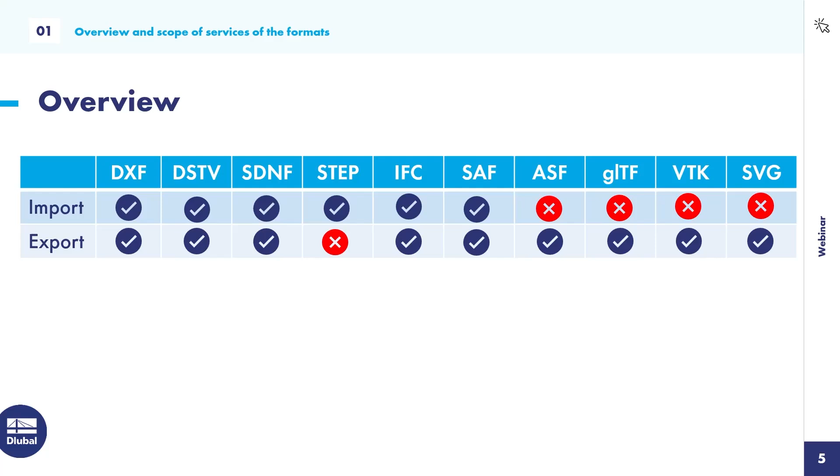Let's see what's behind that. We will start with the DXF interface and some brief overview about the import and export possibilities.

Concerning the import, we mainly support the import of nodes and lines. You can, however, also import members from the DXF format. To do so, you have to mention the cross-section and optionally the material name inside the layer, and then we can read this information and automatically create members. We can also import surfaces from AutoCAD, however only if the object is a 3D face element.

Concerning the export capabilities, here we mainly export nodes and lines, so members with the graphical rendering in RFEM will be exported as a simple line, not as a 3D rendered object. We can also export dimension lines, and concerning the results, for example the FE mesh or the deformed structure, as you can see here on this graphic.

One more information regarding the import: there are two options. We can import the DXF information directly, so you get the lines and the nodes and so on, or you import a DXF as a background layer. That is of course also possible.

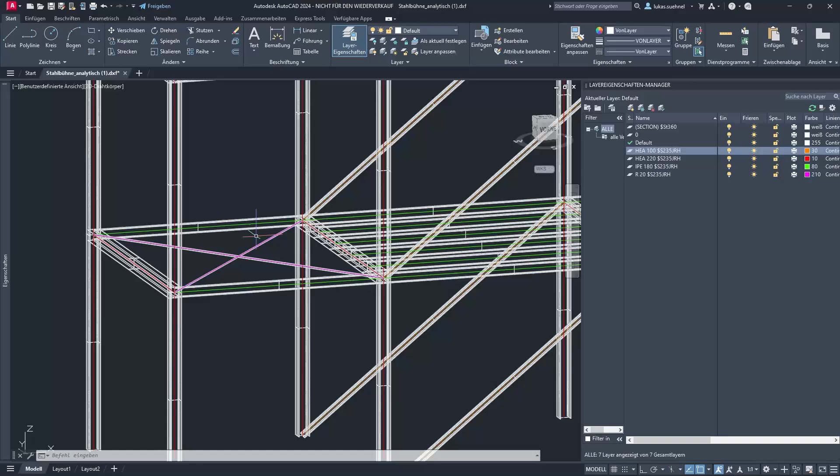So if you have that, you can import this into RFEM 6. I already saved it as a DXF file, so there's nothing to that. And then I can go into RFEM 6, go to File, Import, and use here DXF2. I can select the DXF file, and then I will get a little dialog that allows me to define additional settings.

First of all, I want to rotate the structure because otherwise it would be upside down due to the global coordinate system. I want to generate the members based on the layer names, and I also want to import only selected layers. So in that dialog, I already see which layers I have inside that DXF file, and I'm not interested in the default or the specific section layer - I only want to import the center lines, basically.

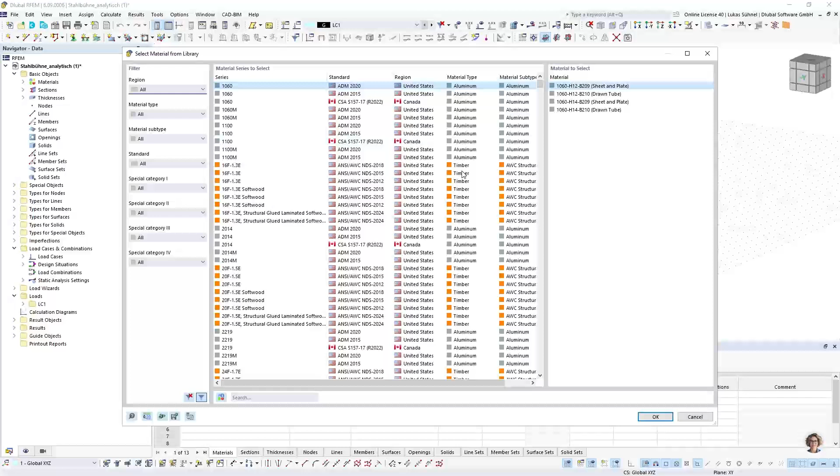Let's take a short moment. The cross-section or the conversion tables will open. In case your layer names do not match the cross-section or material names inside RFEM, you can define them in this conversion table, assigning the related Dlubal material or section, and then import it.

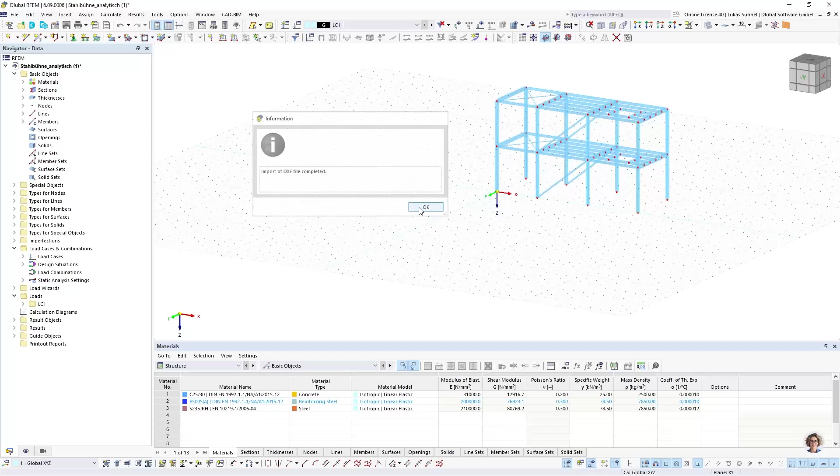Should be filled correctly on my side already, so I don't have to do it. I just click OK, and now RFEM will lock itself. You can see it on the bottom, everything is grayed out, I can't do anything. This is on purpose, since we are using our API to read this data, and while the API is working, you're not allowed to do anything in RFEM, so we are locking the screen.

The import is finished, and you can see the same structure here in RFEM now. We can briefly check the imported data, for example by using a specific display function. I can use colors of rendered objects by object property, member section, for example, and then quickly double check if I have the right sections in my file - basically if the conversion was set up correctly.

Or you are running additional checks, for example under Tools you have a model check for identical nodes. It shows up quite often that in DXF files there are nodes very close to each other, or lines, multiple lines on the same location, and we have these model checks that can help you find these situations. For example, you can set the tolerance for identical nodes to 1 centimeter, and then check if in a radius of 1 centimeter there's more than one node, and you would see those nodes here. It's not the case here, so should be fine.

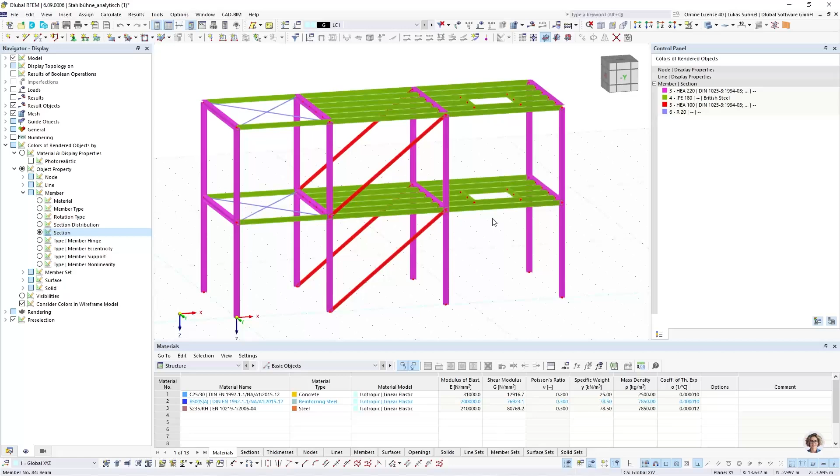And with this data, with these native objects, members, lines, and nodes, you can continue with the loading, the supporting, adjusting the structural model in general, of course. That is the DXF import.

And now I also want to show you the export. So let's open another file - I have them prepared, of course. That is a membrane structure, a little tent basically. Let me show that quickly.

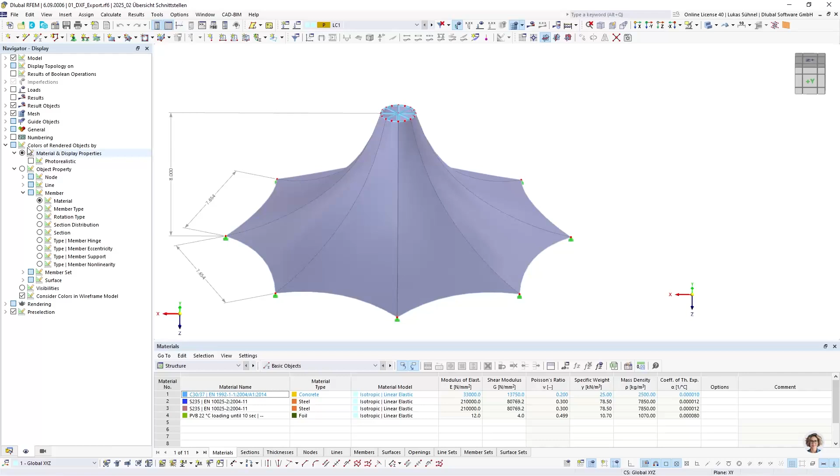All right, so here already with the results, but I can turn them off. So maybe just some brief information: in RFEM 6, you're able to run form finding calculations.

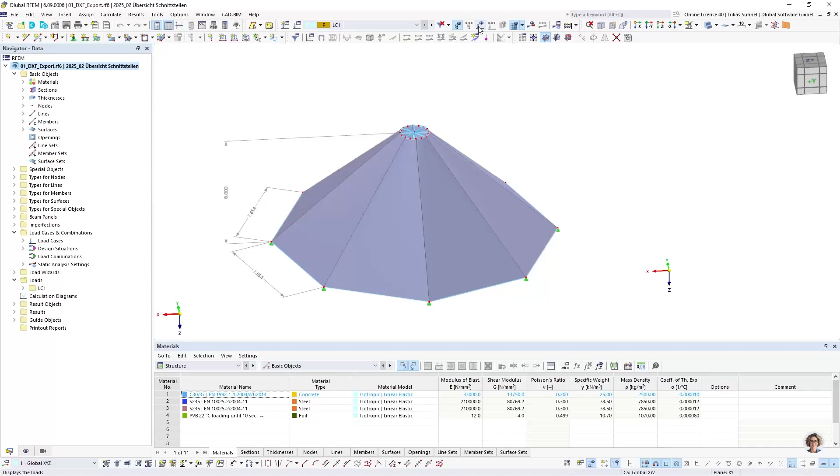Therefore we have this specific add-on, form finding, that allows you to model these membrane structures as we have it here. You can support these membranes on the bottom, for example, via a cable, and on top with this supporting circle of beams. And then you need a pre-stress load case, and inside the pre-stress load case you can define the target force, the target stress, or the target sag of membranes and cables, which has been done here.

And then you can run the form finding, and RFEM will calculate the required shape, or the shape that is required to fulfill these loads, or these predefined loads.

Now that is the result, and it is quite common to export these structures into AutoCAD for additional drawings and so on. So we developed not only the DXF export, we also included options to export the deformed shape.

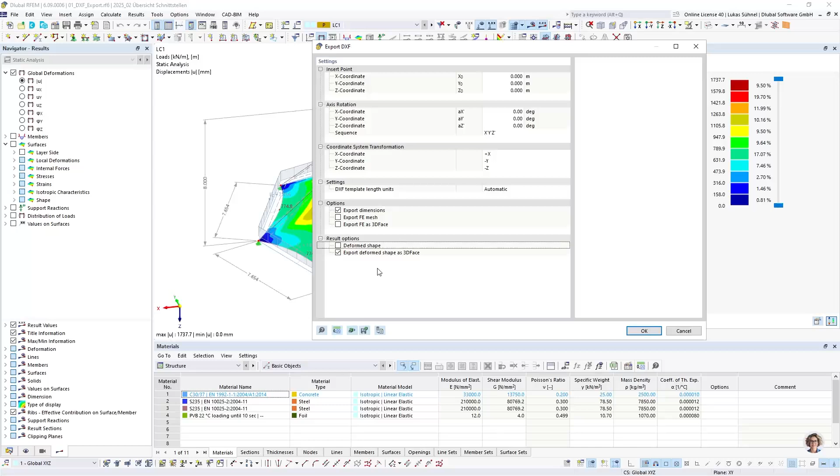Put it on my desktop. And I have here various options for the export. I can export dimensions, I can export the original FE mesh, so the FE mesh that we create before the form finding analysis, which I can export, but I'm not interested in that. I can also export the deformed shape, or actually I'm just looking for the deformed shape as a 3D face, which helps me with the rendering. So these are the settings.

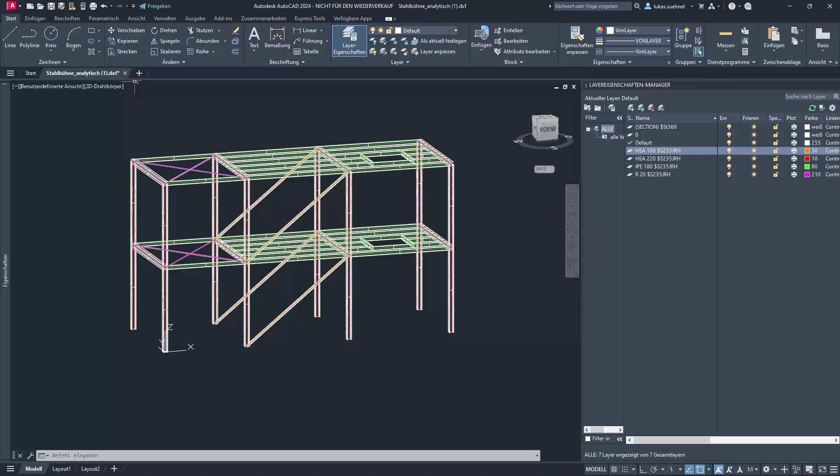I press OK. RFEM should be locked again in a second, because we're again using our API. Yep, happening now. And as soon as it's finished, it will unlock and give us a message, export is done. Now I can go back into AutoCAD, maybe close this file here, and then I can open the deformed shape DXF.

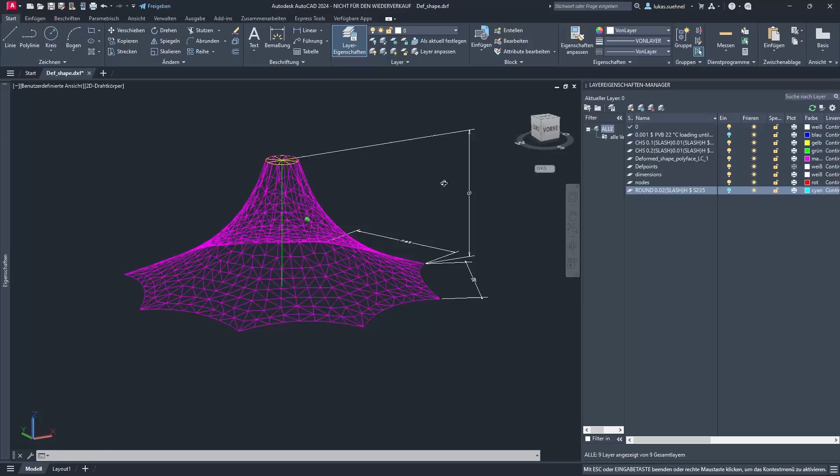Let's zoom in. So that is the result. Now I can hide a couple of layers which I'm not interested in, these cables for example on the bottom, and I can display the deformed shape, and also use a different rendering setting for a nicer graphic.

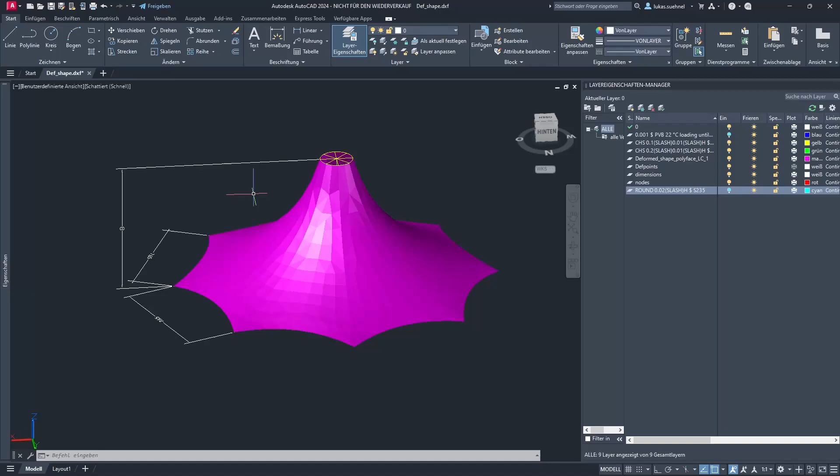That is what we can do here. We can also see the dimension lines - it's not just simple lines, it's a real dimension line where I can change the settings and so on. All right, so far regarding the DXF interface. Let's already go to the next one, and the next one is the DSTV interface.

The DSTV file format was developed, introduced by the German Steel Construction Association. I have a product description from 2000, so it's a rather old file format, but it has many strengths when it comes to exchanging pure beam structures. It contains relevant information such as cross sections and materials for the members, but also supports, hinges, eccentricities, member types, set of members, member elastic foundations, and concerning the loading, the typical nodal loads, member loads, imperfections, and of course load cases and combinations.

Due to these diverse options and the simple definition inside the format, which I will show later, it can be found in many programs. So many of the steel detailing, but also other programs, use or offer an import and export into the DSTV file format.

And I listed some of them at the bottom: Tekla, HiCAD, from the steel detailing area, then CADwork, HSB CAD, SEMA from the timber construction world, but also additional programs like BuildSoft, Infograph, and many more.

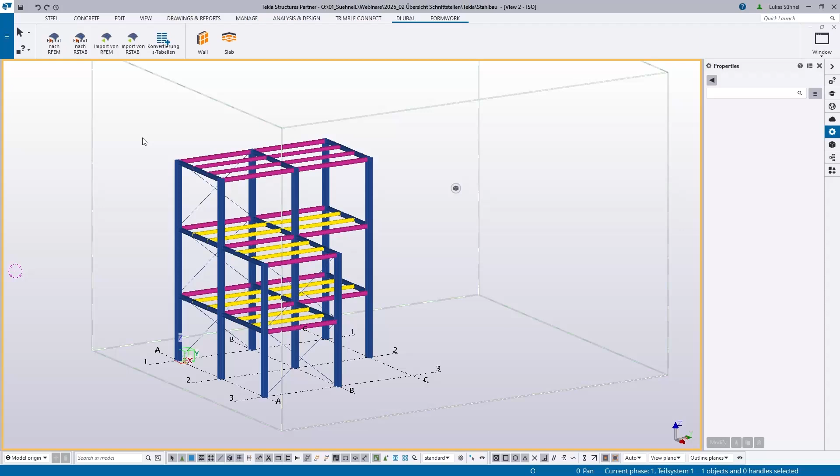I want to show how you can do it. First of all, you select the objects that you want to export, then open this menu and go to export. Now, not so well known, I would say, is the FEM export, and here you find the DSTV file format.

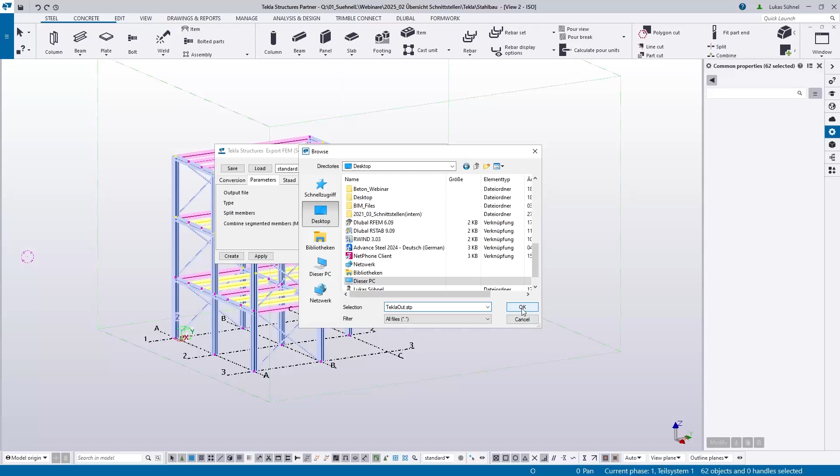You can select the output file location under the parameters tab, so I put it on my desktop, Tekla out. Little hint: add the .stp description here, then it's easier to find it in RFEM 6 when we are importing it. Press OK, then click on apply and create, and the export should be done.

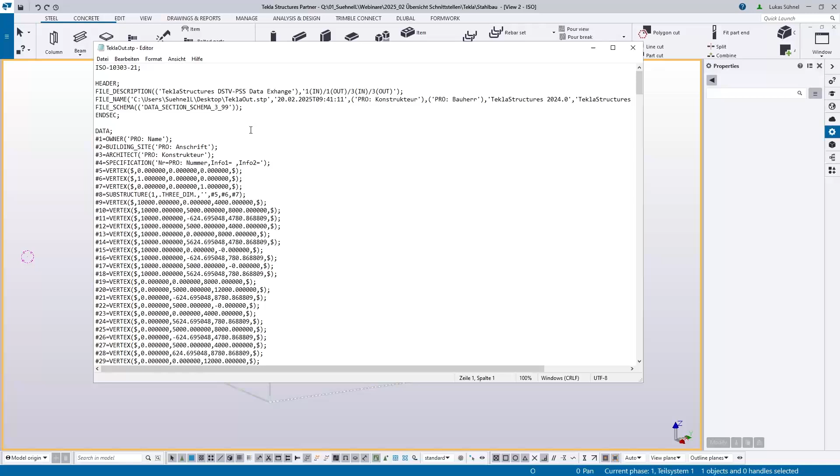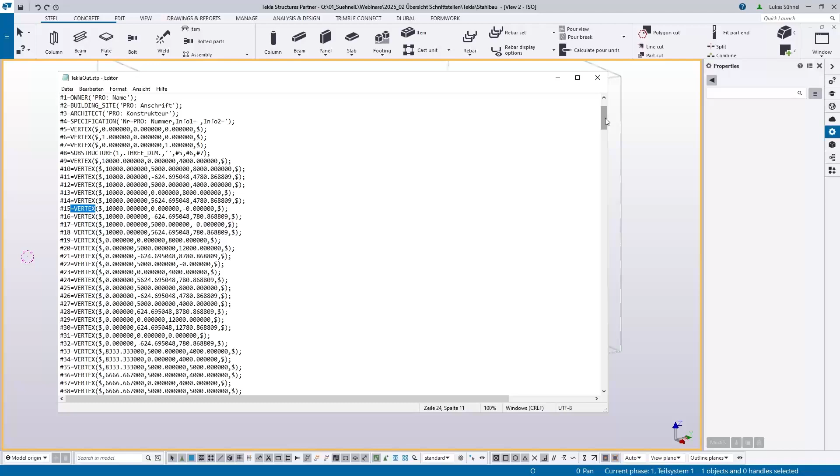Let's have a brief look, I will open the file. This is how the file format looks like. You can simply open that STP file with an editor, and you can see the program it originates from, maybe even the person who created it, the version of the program, and then you get a long list of nodes. So vertex is basically the node, with coordinates, then we have the material and the cross sections.

Here the focus is usually on the name, because we are converting the names anyway. It's not about importing the cross-section values or something like that, which can also be documented in here, but theoretically Tekla doesn't do it.

After materials and cross-sections, we have these elements, and these are basically the beams. So the beam or member type, start and end node, the cross-section at this member's start, cross-section at member end, so it's possible to exchange also tapered members. Further down, there can be more information about loading and hinges and so on, which is not the case here.

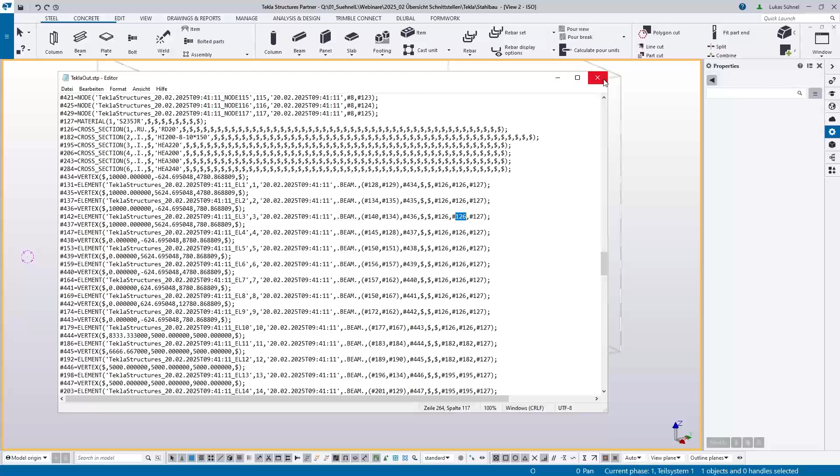All right, so let's import that file into RFEM 6. I'm closing this membrane structure. File, import, DSTV. Desktop, just navigating into my folder, Tekla out. Okay.

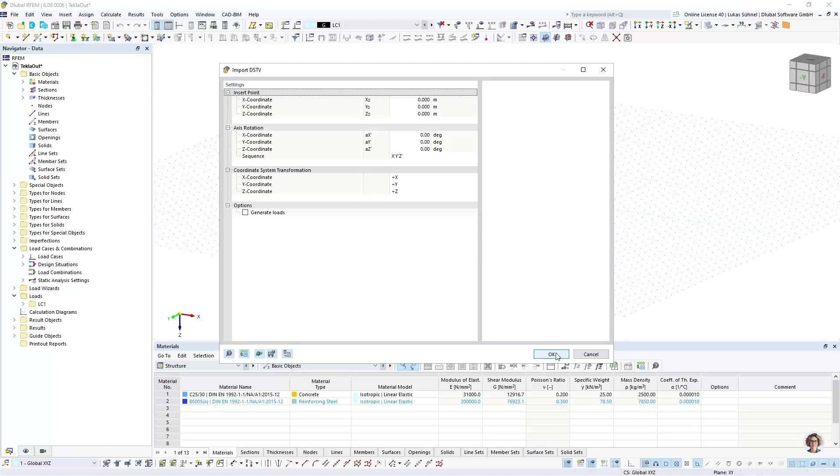RFEM will be locked again after I define, or after I press OK in that screen. So I could import the loads, but there are no loads inside, so I leave this toggle unchecked. Then again, conversion tables to match the section names - I did that already. I can press OK, and the import will start.

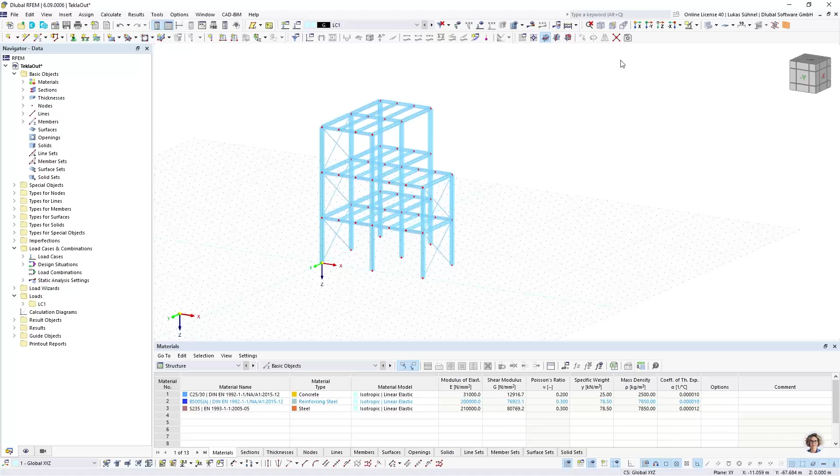All right, so import finished. We have a couple of free nodes which have no use in that moment. I can get rid of them by going to the edit menu, select, and then we have an option free nodes. All of these free nodes will be selected, and I just hit the delete button on the keyboard and they are gone. Now you can see we have the same structure as we had in Tekla.

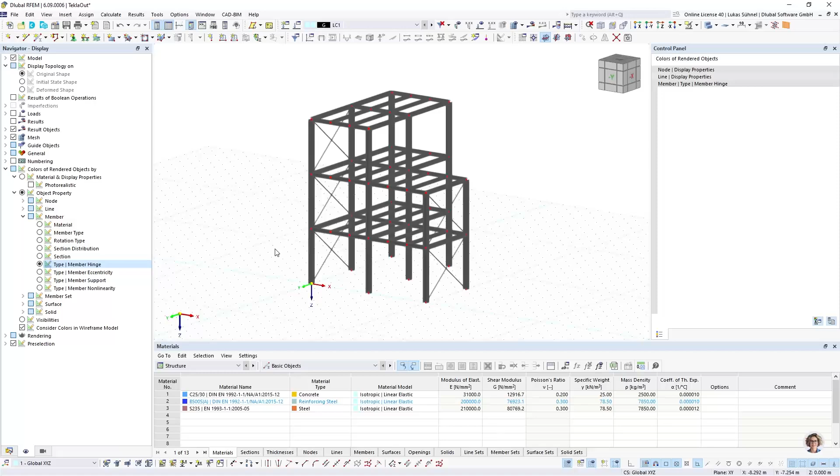Again, I could double check the content by using some rendering functions for the cross sections or member types. Here I can see it's just member type beam, and if I select the member hinges, there are no hinges assigned. So I got a model from Tekla where every beam is connected rigidly to the next beam. That is not ideal - in RFEM, I would continue now with adaptations concerning this analytical model.

And some of these adaptations could be the following. Let me show rendering by material again.

I could select, for example, all these bracing members and assign them the tension member type, and this can be done rather quickly. I have these synchronized selection options in RFEM, so if I click in the data navigator onto a specific cross-section, all the members with that cross-section will be highlighted.

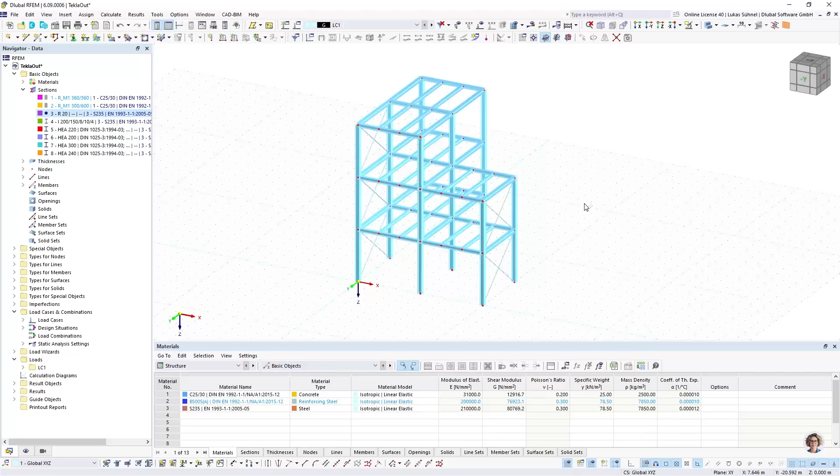So there's no need for me to manually draw little selection windows. Just select the cross-section, then double click on these members and change the member type to tension member. The same could be done for some of these smaller or horizontal beams. I'm selecting these cross-sections, double clicking, and defining member type truss, which means it's a member with hinges for the bending moments at the end.

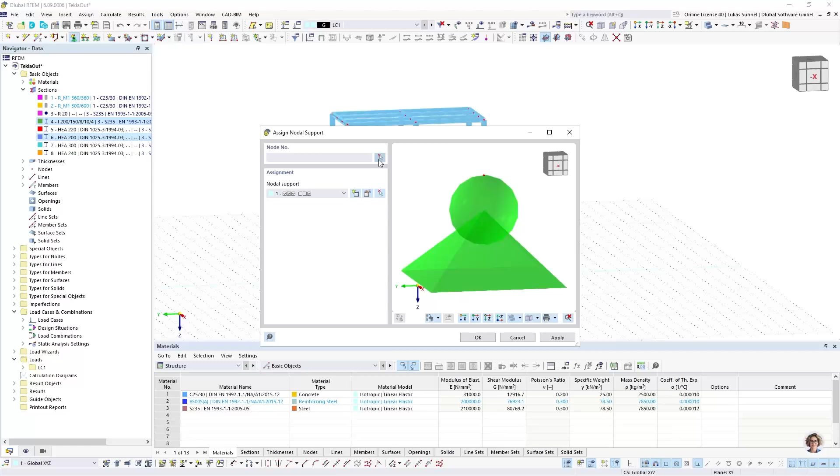I could assign supports and so on, all the things that are required. And then I can assign loads and so on.

And of course, I can also export this file again into the DSTV format. File, export, I'll put it again on the desktop, RFEM out. Okay, again it takes a little moment. All right, RFEM out - I can open it with the editor.

And we have, of course, in general the same information inside here, but we sort them a little differently. We have chapters, coordinate system, nodes, then cross sections, materials, and again the members - and you can see now we have tension members, truss members, and beam members. So there is definitely a modification visible.

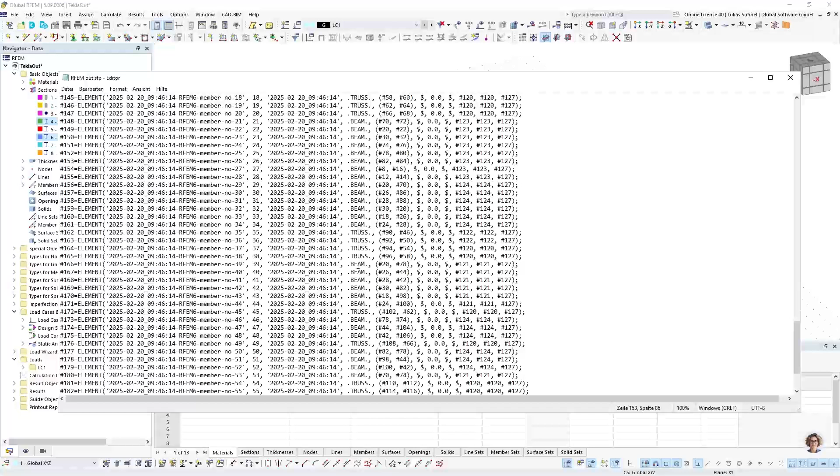And this file can of course be imported into any of these other mentioned programs.

All right, let's go to the next file format, the SDNF format. The name should be steel detailing neutral format, so a neutral format for steel detailing. It was developed by Intergraph for the purpose of exchange between structural analysis programs and steel detailing programs.

I think you can also see under additional programs that it's mainly used in these steel detailing programs: Advance Steel, HiCAD, Tekla Structures, Aveva E3D, and so on. It can be used for the transfer of beam structures - materials, cross sections, uniform members, no tapered members - and eccentricities, but it also supports surfaces including openings, at least on our side.

The format has more capabilities, for example connection details, curved elements, and loads, which are currently not supported in our export or import.

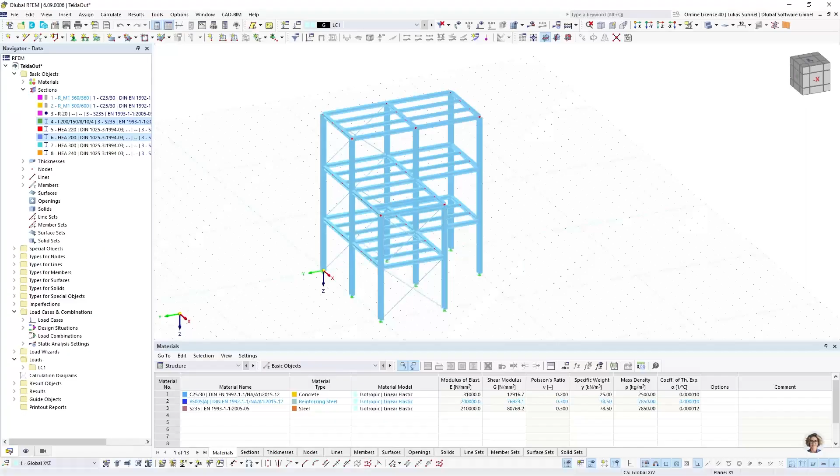Yes, let me also give you a brief demonstration of that format. I will close this file and open another one, which is this one - it's like a cantilever truss structure, if you want to call it that way.

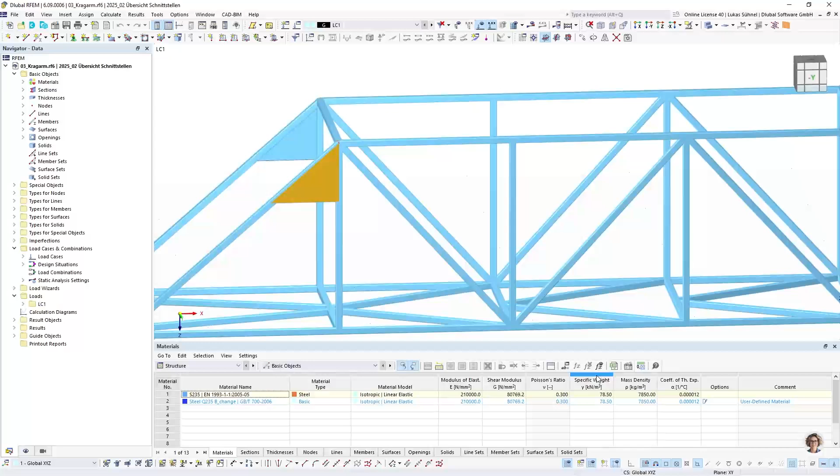So mainly beams, but also some surfaces here, 8mm thickness, to get a more rigid steel joint in that area, and then on the end also a surface with an opening. That is maybe the structure that we want to give to the steel detailing person to save a little bit of time with the modeling. And we can do that.

My plan is to import it into Advance Steel, and for Advance Steel the ideal format from our side is the SDNF format. So I go to File, Export, SDNF, and under the desktop I will save this - however we want to call it. I want to export linear members, surfaces, and openings. Yes, I press OK, and while the export is running I will look for Advance Steel on my PC.

All right, so let me call up Advance Steel. I can use this menu for importing files - here, however, I won't find the SDNF format. You can find it under the Export and Import menu or tab, and then you have additional formats: IFC, CIS/2, SDNF, which we are going to use, but also DSTV and others.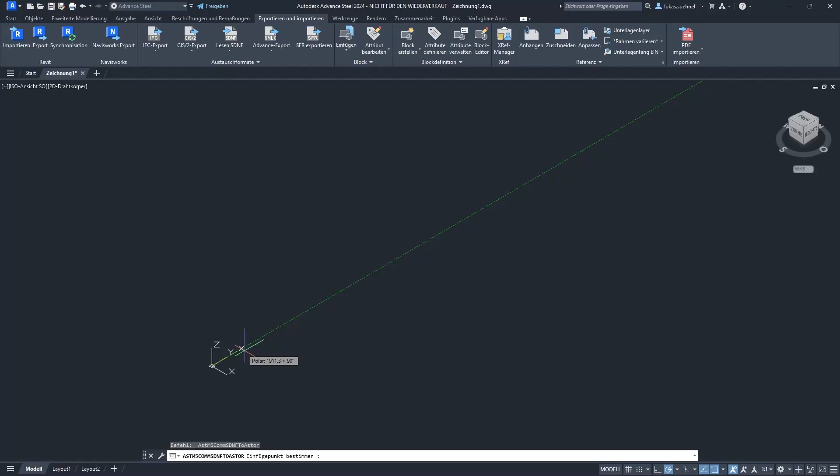Let's see - sometimes we have to do a cross-section conversion similar to our program. Advance Steel reads the cross-section names from the SDNF file, and if it doesn't know what Advance Steel cross-section it should be assigned, then you have to assign it manually. I did that already for the German webinar, so the window didn't pop up here, but we have the cross-sections, which is the most important part.

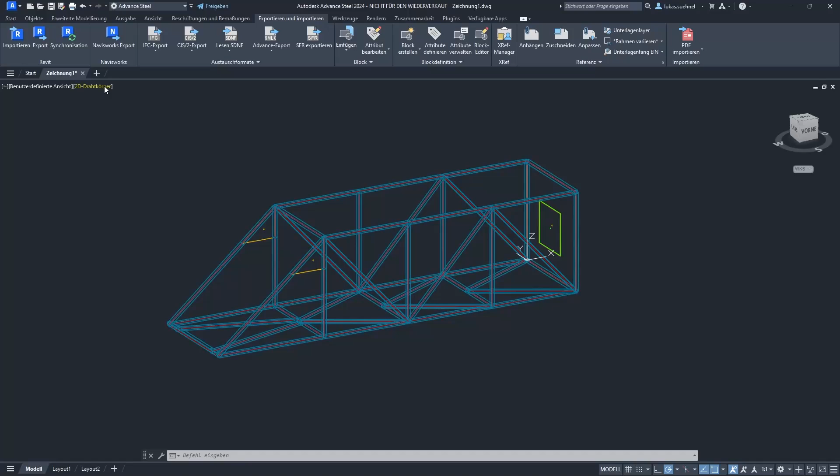And now let me change the rendering a bit, and we can clearly see that the import was successful - I get the same structure. And it's not just graphical objects, we can also see the information here, so thickness 8mm - I can display the cross-section.

Hollow cross-section 40 by 3.

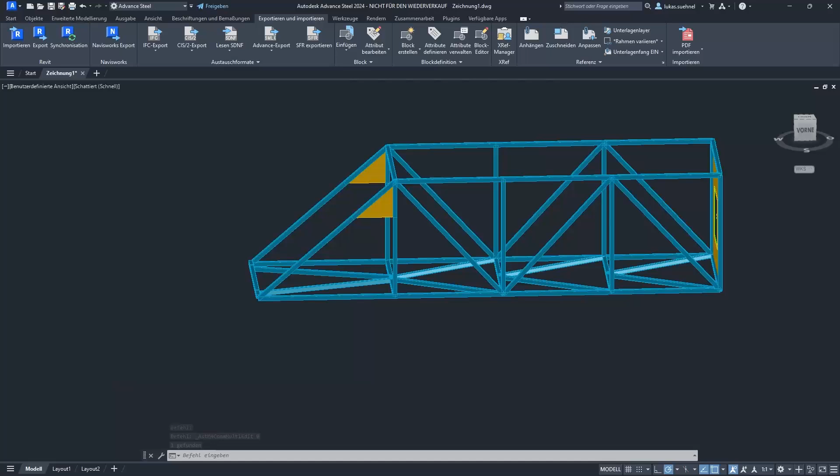So we got the information that we need, and now we can continue in Advance Steel and assign, for example, the connections. This could be done via advanced modeling, and then I have here a connection manager, which shows up on the wrong side.

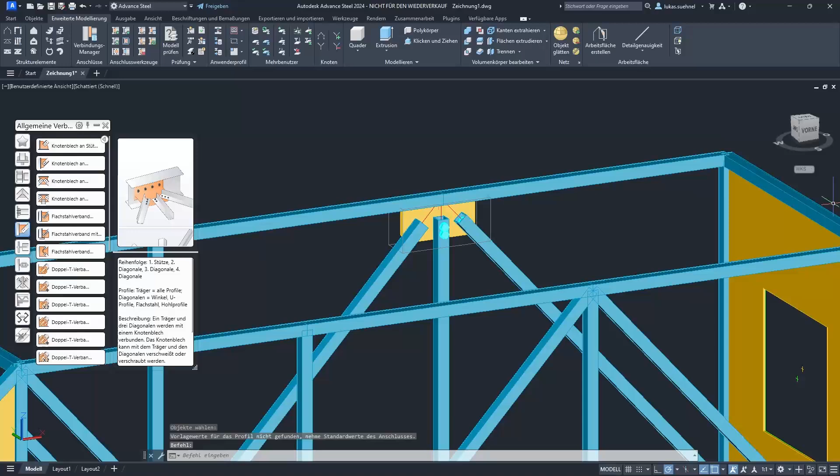For example, I want to have a connection in that area. So I could select, let's say, fin plate with 3 connected diagonals. I select the main beam, then the first diagonal, second diagonal, third diagonal. Then I get a preview of my connection, which I can rotate a bit and modify further in the other dialog that shows up.

For example, I could modify the fin plate, the amount of screws, the diameter - maybe diameter 12, just 1 screw or bolt. And when I'm done, I can close it and I have my connection here.

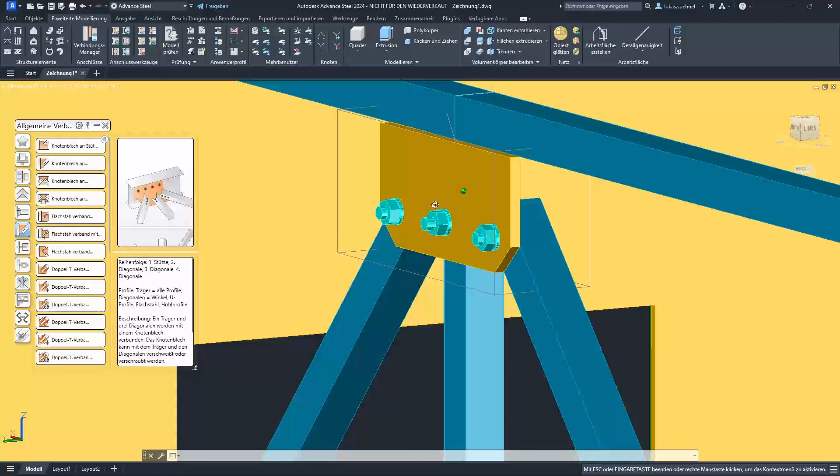So it's clearly visible, even though we exported based on the center lines of the beams, which we can see here, that is not an issue in Advance Steel. It doesn't matter - it will cut or shorten the members according to, for example, the steel joint that we define here. So it's definitely usable.

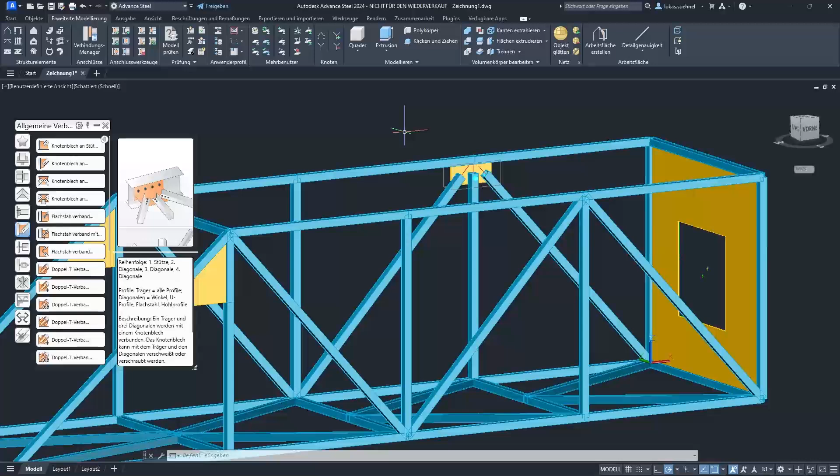Okay, so far regarding the SDNF format. Let's have a look at the next one - the step file format.

We support only the import of that format, not the export currently. Concerning the import, we are reading nodes, lines, surfaces, and solids. It is a format mainly for exchanging solid structures, 3D objects. Cross-section materials and members is not exactly the purpose of that format.

You also see that when you check which programs offer step imports and exports, usually it's common or general CAD programs, or CAD programs with a mechanical engineering background - SolidWorks, Inventor, CATIA, Siemens NX, Rhino.

And again, it is for the exchange of solid models. Usually when you model something in, for example, Inventor, even though it's maybe a 3D hull where you think of beams, cross-sections, IPEs and so on, when you export it into the step format, you get solids for every member. And therefore, I think the use case is not so much for beam structures or typical buildings.

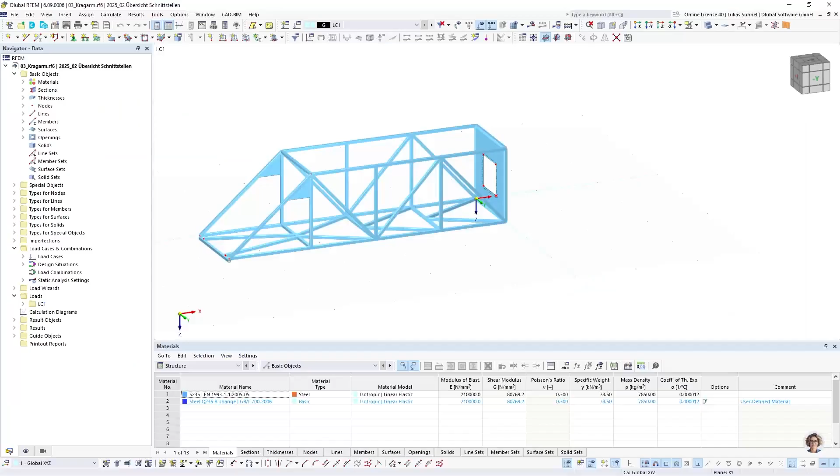So I go back into RFEM 6, and I'm going to import the structure that we just saw on the PowerPoint. I will open here the step import and go into my folders and run it. Maybe while it's running, one more information that I should mention, because it is a common question.

There are two formats with the same ending. The step format, which is for the exchange of solid models, STP, sometimes even STEP. And we have the DSTV interface also with .stp. This, however, as I said, is mainly for beam structures. So they couldn't be more different - beam structures versus solid models.

Sadly, they use the same file format ending, which is causing confusion, because often we have customers reporting that the step import isn't working, but then they got a DSTV file, or the other way around. So make sure to check which file format really has been exported from another software, and then use the proper import in RFEM. The good thing is you can also open these step file formats with the editor, and then you somehow see - is it a DSTV file or is it a step format?

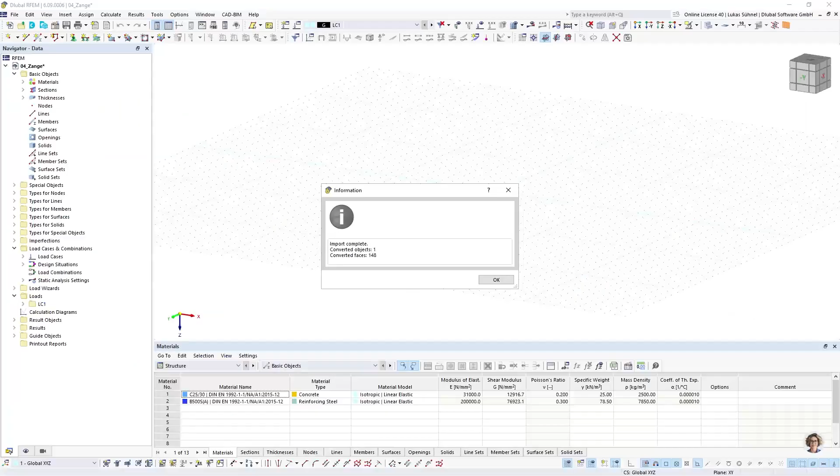All right, concerning RFEM 6, the import is done. We can see the structure here. Let's change the rendering - I should have rotated it before, but doesn't matter. We got the solids from the step file into RFEM 6.

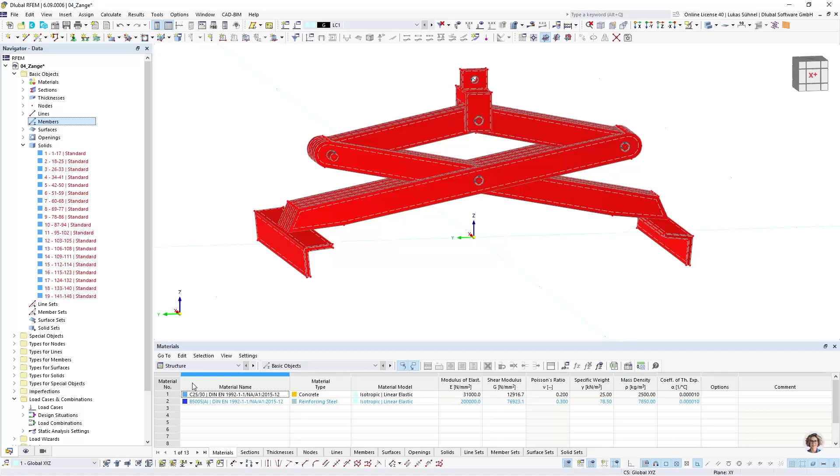We can see it here. There are no members, but we have a list of solids currently displayed in red color, which usually means something is not correct. We can check it - select one of the solids, double click, and we can see directly the material is missing. As I mentioned, materials won't be imported on our end, but it's easy to assign a material. Let me use an S235. And with that information, the solid is valid.

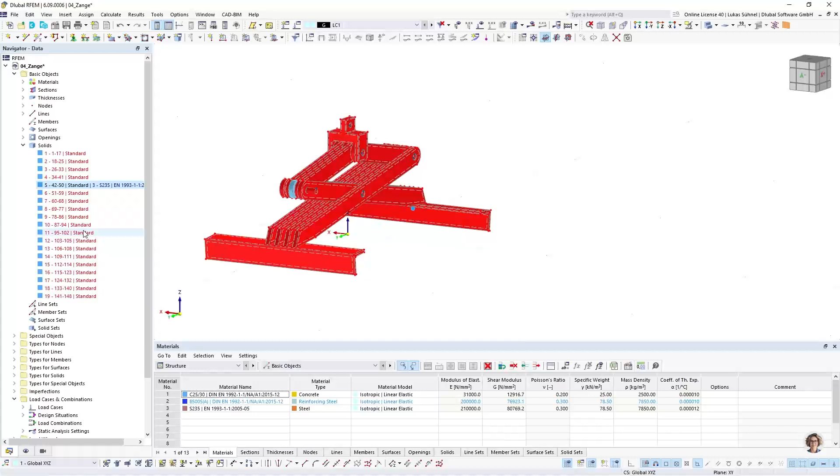I can do it for another one. Just a second - this one, for example.

Edit, and then I assign the material. I can, of course, use multi-selection and do it for all of them. For today, two solids should be enough, because I want to show how you can use the step file.

Now let's display these two solids, selecting them again in the navigator, and then just these objects and related objects. I can hide the other information in the background, and we can see we have the solid from the step file here, and in theory it is a valid solid.

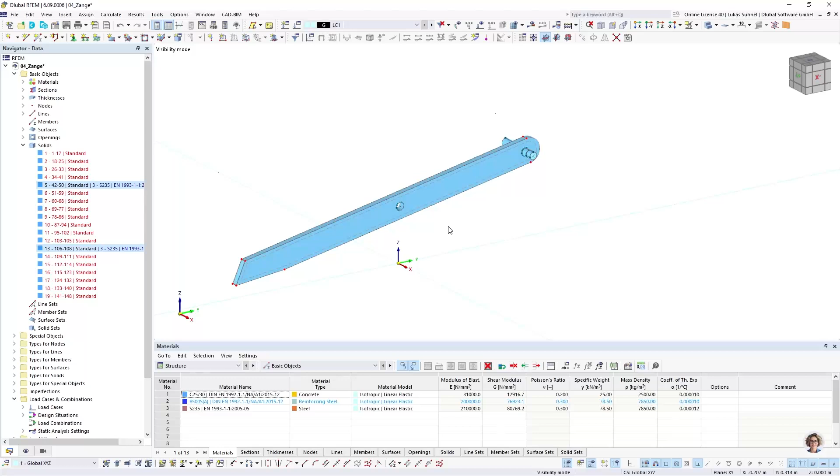The question is whether you first want to design this structure as a solid structure, or if you want to simplify it into surfaces or beams. And if you decide to use solids, you still have to manipulate the structure. For example, in that area we have the bolt here, and we have the solid, but there is no information about how the forces should be transferred from the bolt to the metal plate.

Here we would use surface releases or contact solids. So usually, in 99% of the cases, you have to do manual adjustments after a step import.

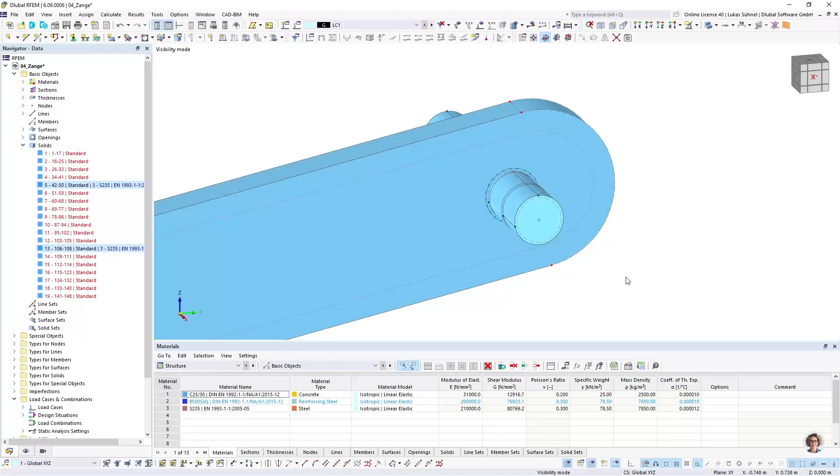In my case, I would not use solids. I think a surface and a beam structure would be fully okay, or would be enough. I want to simplify it. And how can I simplify such a structure here?

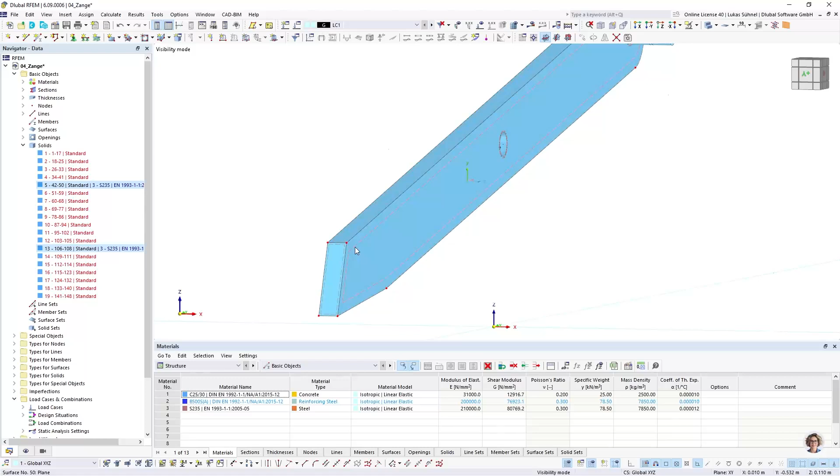Here I have a plane, let's say a plane solid. So I can easily select one of the faces, go to Edit, select Related Objects. Then it will also select the openings and everything that is related to that surface.

And I can use the drag and drop functionality. So I just keep my mouse pressed, hold the control button pressed on the keyboard, and then I can create copies of that object that I selected, and I will place it in the center, for which I have a snap point, and then I have this additional surface.

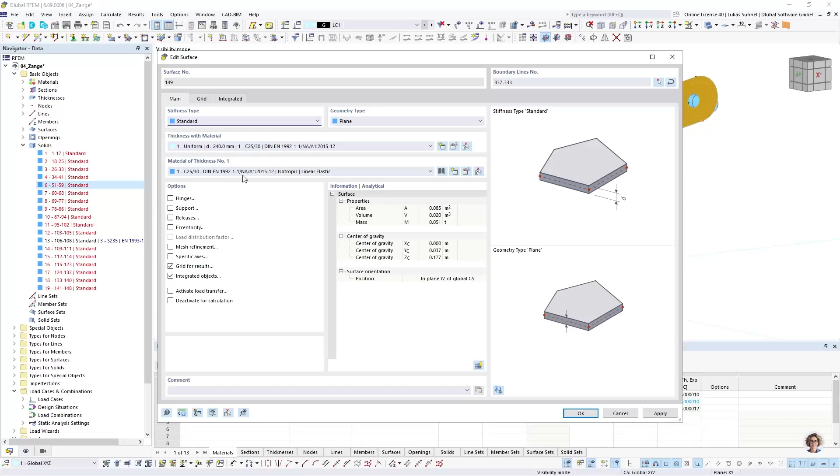That's all I need for that object, so I can select the solid here in the navigator and say delete with boundary surfaces, and then only the surface is remaining. I can assign thickness and a material. For now, I don't care how thick it is and so on. I could define it in here, and then it's of course a valid surface.

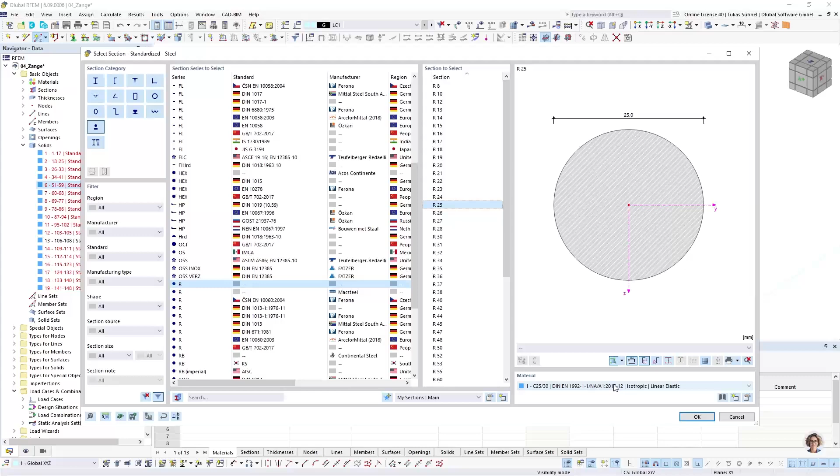Same for this bolt. I don't want to use a solid here. I want to use a beam. So I go into my library, select an R25, which is the diameter of that bolt, R25, with the related material, and I am catching here the snap point, the center of a circle. That's the snap point I can select. Same on the other side.

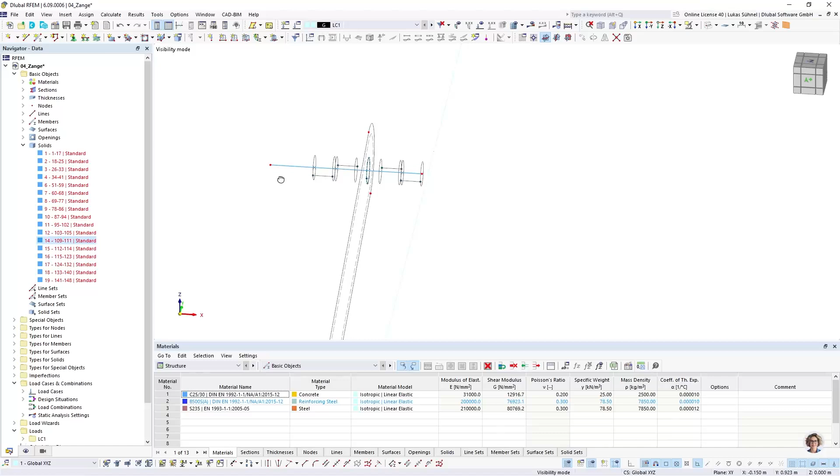And then I have here a member, and I can delete this solid with its boundary lines. And then we can change the rendering. There are some lines remaining. I can simply delete them. And I have my simplified surface and beam structure.

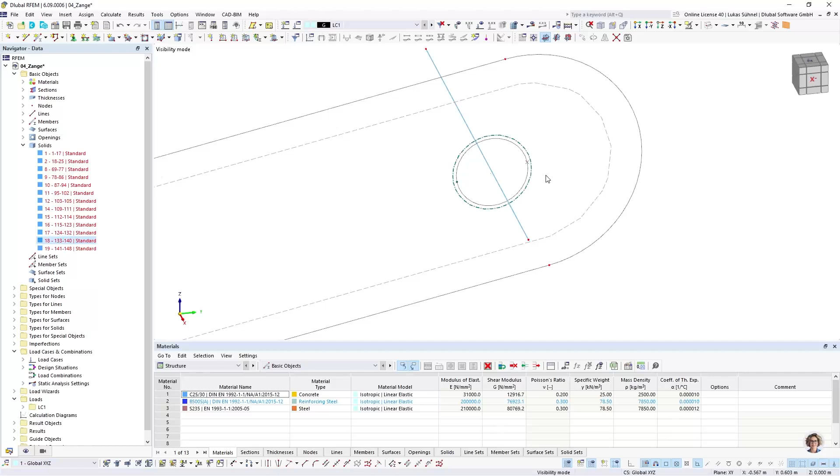Concerning the connection between this bolt and this metal sheet, I would use maybe a web of members, of beams, or coupling members to create a proper force transfer. This would be my simplified approach for that model.

Let's display everything again. And you can easily copy this surface to the other two sides, do the same steps for the rest of the structure. I think it is a valid use case, the step import.

All right, so far regarding this interface. Let's switch to the next one, which is the IFC format. It's the format for the construction world, civil engineering world.

We support the import and the export, of course. Concerning the import, we are able to import the IFC files from versions IFC 2x3 or IFC 4. We can import the structural analysis view and the reference view, which is not so well known. Usually people or customers only know that there is the IFC format, but it's not so well known that it has different views, or let's call them subformats.

What is quite common is the reference view. This is what you usually connect with the IFC format, architectural representation of objects. So every object is a 3D solid, basically. And we can import that, of course.

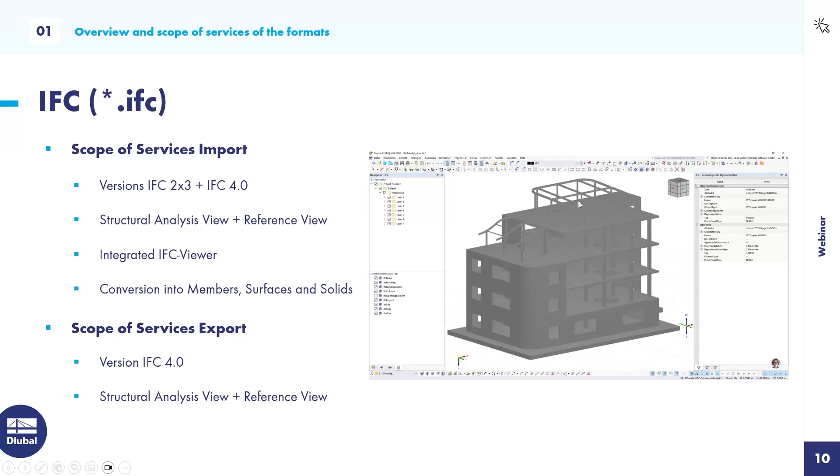So we decided to extend the export also for the reference view. I won't show it live now, first of all due to the time, but also because I already gave a webinar about this topic. More details can be found in that webinar.

So the next interface is the SAF interface, the structural analysis format developed by Nemetschek in cooperation with other structural programs. It is a file format for the exchange of the analytical model. We support the import and export, currently version 1.0.5, not the latest one. We are aware of that, and I'm quite sure we will update the interface to the current version 2.2.

Nonetheless, you can use it to import and export model data such as members, surfaces, supports, hinges, eccentricities, but also load cases and loads like node loads, member loads, and surface loads. It is similar to the IFC structural analysis view. The main purpose of this format is the exchange of the analytical model, for example between the structural engineer and a checking engineer, which is quite common here in Germany, like a second instance checking the structural calculations.

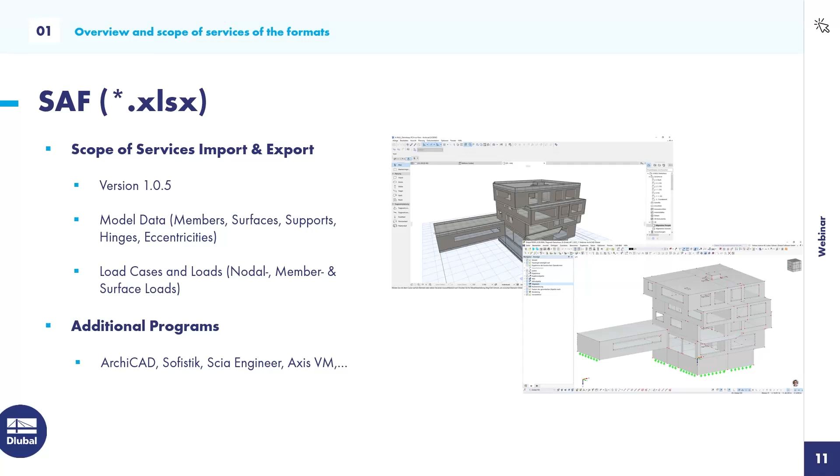Okay, the next format is the ASF format. We remain in the Nemetschek and Allplan world. It is a format especially for the data exchange of reinforcements, mainly for Allplan, but I think other concrete detailing programs also support the ASF import. So what is the scope of services here? We can export our surfaces and the required, provided, or not covered surface reinforcements into the ASF file, and then you can read that file in, for example, Allplan.

There you get dynamic graphics. You can see the required reinforcements on the top or bottom side of the surface, and the colors represent different required AS values. Now you can define the reinforcements, for example a mesh reinforcement inside that surface, and these graphics will then show the remaining or not covered reinforcements. So you can graphically see where something is missing, where you have to add additional rebars. That is the use case.

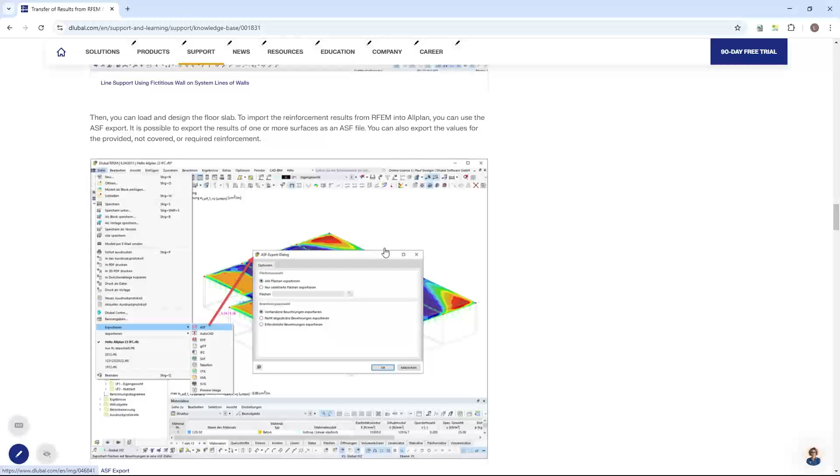This use case has also been described in a knowledge base article by my colleague Paul Sivolgin, titled the transfer of results from Rfem 6 to Allplan using ASF files. It's a nice article, feel free to read it. It contains the most important information, the dialogues, and how you can import it into Allplan. So I won't show it live, but there's a good article on the website.

Now let's come to the last three file formats that we have: GLTF, VTK, and SVG. All three file formats are, how should I say, a byproduct of our own development. We are using them mostly internally for other use cases, but since we are creating them internally, we thought why not offer them also as an export option inside RFEM 6. I wanted to give you a brief overview about the capabilities of these formats to see if they have a use case for you.

I want to start with the GLTF file format, which is a file format for the export of the 3D scene. You get a 3D model out of it. You can visualize the model data, loads, results, but also steel joints or reinforcements that we can display. So you can more or less show anything that you can see in the graphic representation of the RFEM model inside RFEM or RSTAB, and you can display that scene either via Windows Explorer or the 3D viewer.

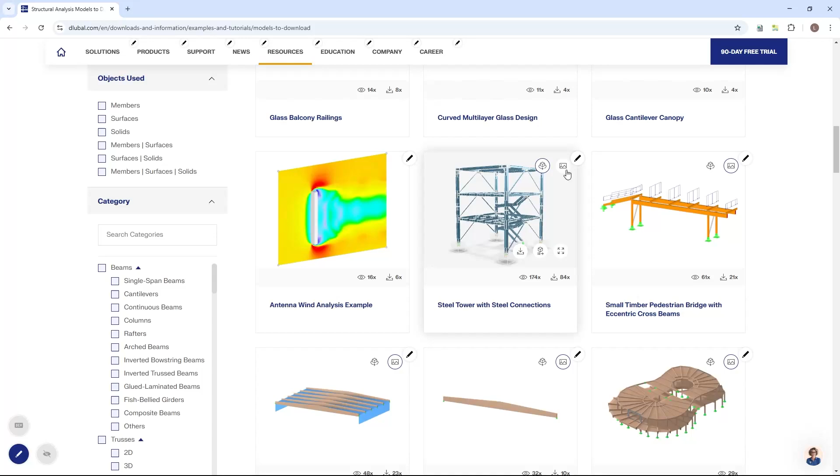And in the background, as I said, we're using this GLTF format. We are also using it if you want to display the file in the Windows Explorer. So yeah, that is how we use it.

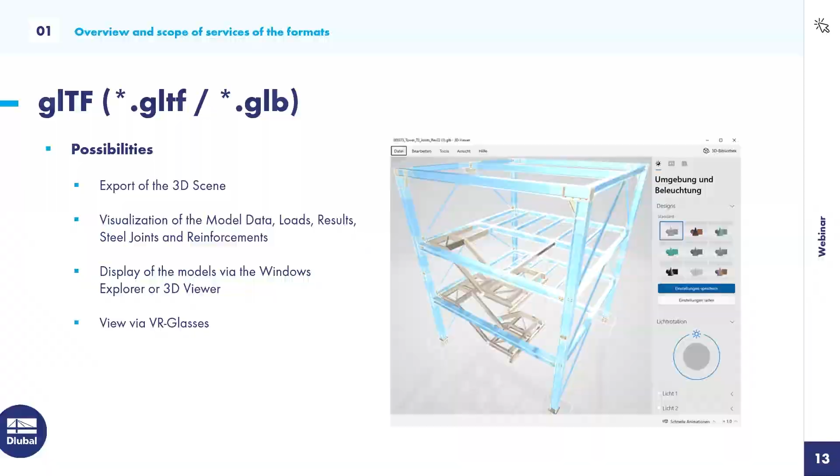And we offer now this export also in RFEM 6, and I want to show it here. So let me close this file and open this file with the steel joints. It's quite a nice file because every connection has been designed with our steel joint add-on.

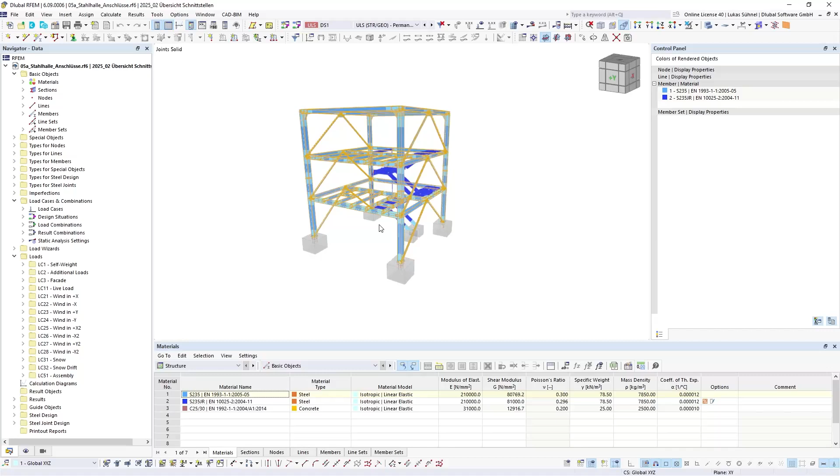Maybe while it's opening - we have a new steel joint add-on here in RFEM 6 that we developed. The benefits are that it's possible to design 3D joints, so there's basically unlimited regarding the amount of members that are connected to a joint. The members can come from any direction, and it's also not limited to specific internal forces, so any force can be considered that you have in the internal beams.

And yeah, this is the new steel joint add-on. You can see here every joint has been designed somehow, and that is quite a nice graphic or graphical representation that we have here.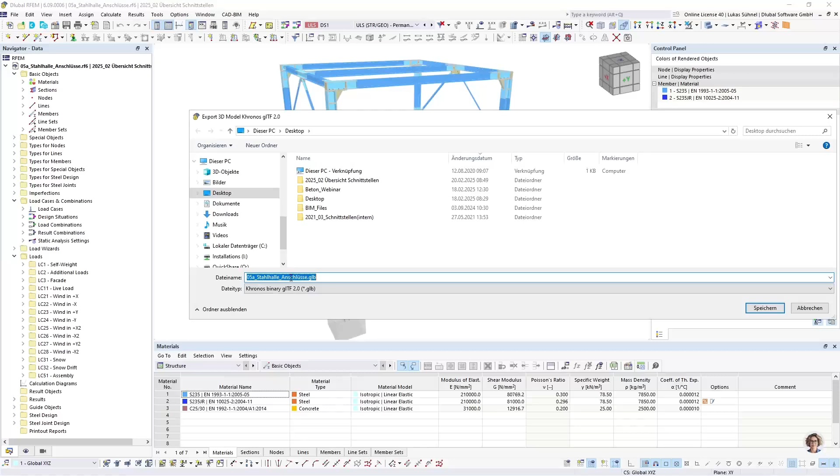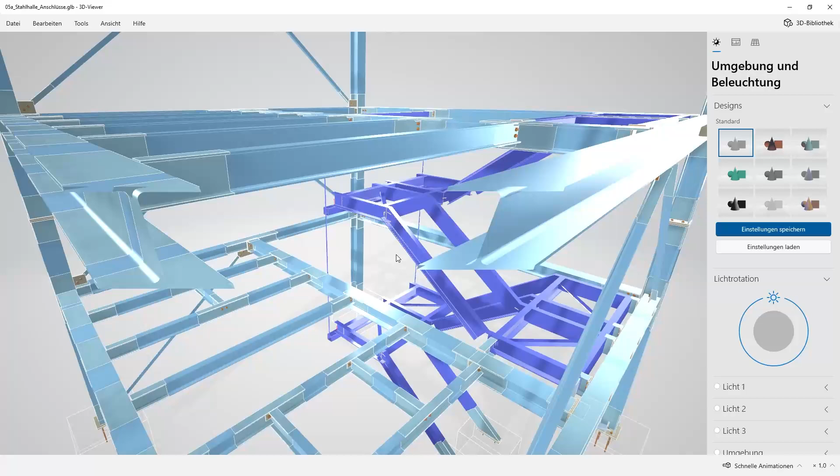And the use case of the GLTF format could be that you want to present your work to the owner of the building, and therefore maybe you want to have a nice graphic, and this can be created via the file export in GLTF. So I save it on my desktop, press save, and then I can open it via this 3D viewer, which should be a default program when you have Windows on your PC. And then you can see already that you can rotate through the structure and zoom in.

It's quite nice to navigate through the structure. What you do not get is additional information, so it's not, as far as I know, possible to click on objects and read the properties. It's really only for the graphical representation for viewing a structure. Okay, so far regarding this file format.

We also have an export into the VTK file format. The VTK file format, or this export as we implement it, is kind of like a container for simplified model data and results, mostly for the results. We are using it for the communication between our Wind program and OpenFoam. Our Wind program is our standalone program, which can also be integrated into RFEM 6. It's like a virtual wind tunnel, so you can calculate the wind pressure and suction on complicated structures and shapes. This analysis is done via OpenFoam, which is a numerical solver for fluid mechanic analysis.

You can see or display these results that we are exporting with the Paraview viewer, and this is what I want to show here. So let me open again a file - this concrete building, for example.

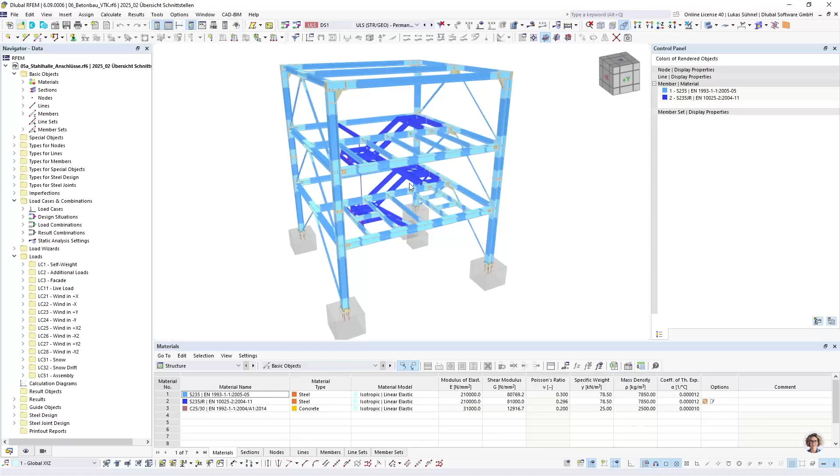For that office building, let's say I calculated the results. So I have here the full range of results: deformation, member forces, internal forces. I also have surface results - stresses, forces, deformations, all these kinds of things. And all these results can be exported into this VTK file format.

You just click on File, Export, VTK. Let's name it Results, save it on the desktop. Will take a short moment. And then you get on your desktop this results.vtm file, which is linked to - where is it? Yeah, to this results folder with additional files. And you can open the VTM file with the ParaView viewer.

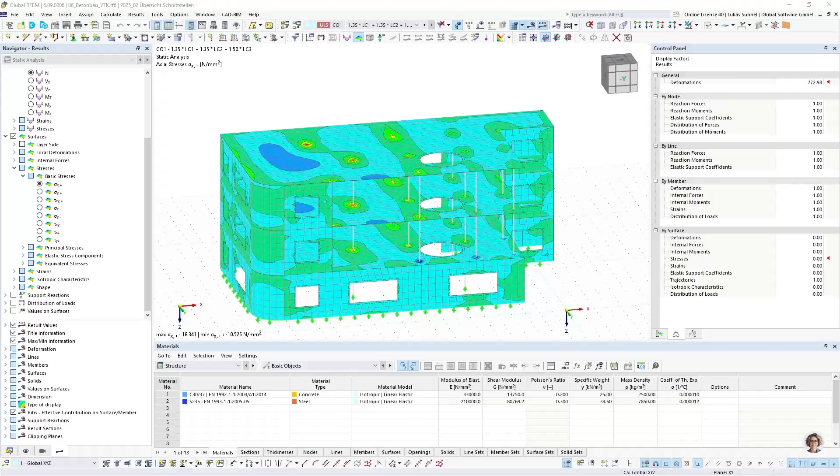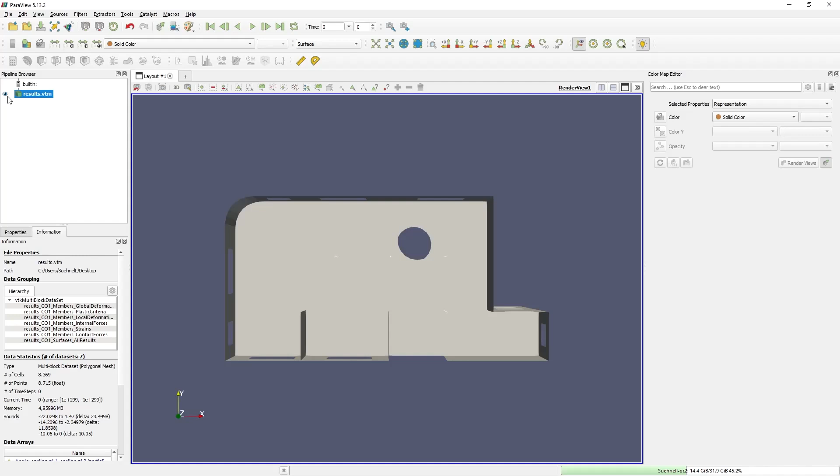Let me show that as well. It's a freeware, you can download it. Just Google ParaView and download, and then you can open the results.vtm file. You can open a lot of files, it's quite a good viewer. Now I'm interested in that file. Press OK, then I activate my file, and you can rotate it. You see it's like a simplified representation of the surfaces and the beams, or the columns in that case.

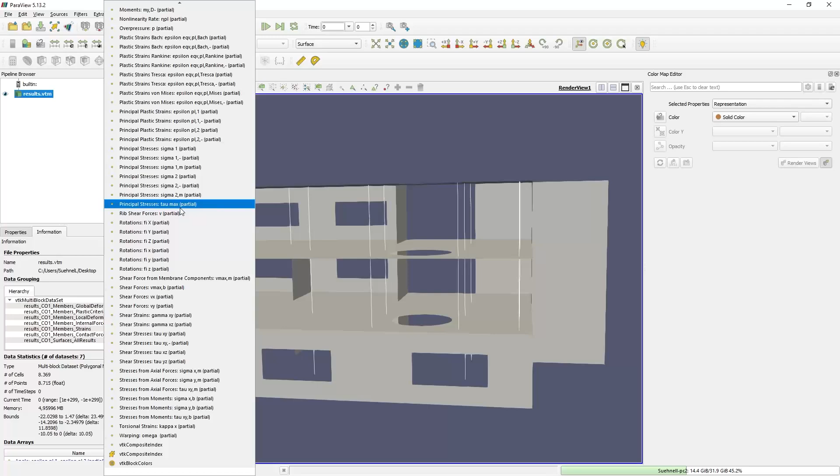The good feature here is that you can select the results that you want to see, and you get them in a graphical representation. So for example, interesting could be - where is it? Displacements, the global displacements. And then you get this rendering. You could change colors and so on. But in general, you can display these results here, and we can double check it with results in RFEM.

So let's display here the deformation as well. And you can see mostly in these areas we have the biggest deformations, and at the front border of these slabs - same results we can see here.

So what's the use case of that file format? I could imagine in case you want to display the RFEM results in your own program, you have, in my opinion, two options. You can use our API to read the results you want to import into your own program, or you're using this VTK file format to export the results into that basically result container, and then read it from that file into your program. That is the use case I can think of.

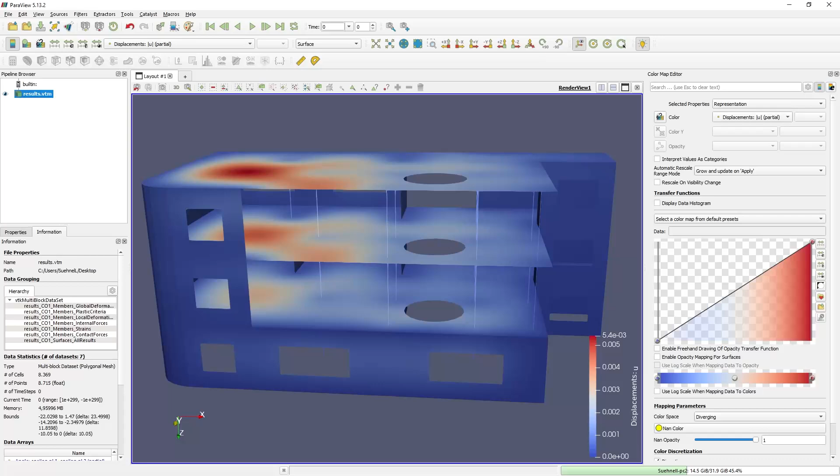Okay, and now concerning the last file format, the SVG file format. It is a format for the visualization of 2D graphics, so it's a simple 2D graphic that you get out of this export. It is a vector-based graphic, so the good feature here is that you can scale your graphic without having a loss of quality of the picture. I can also briefly show that.

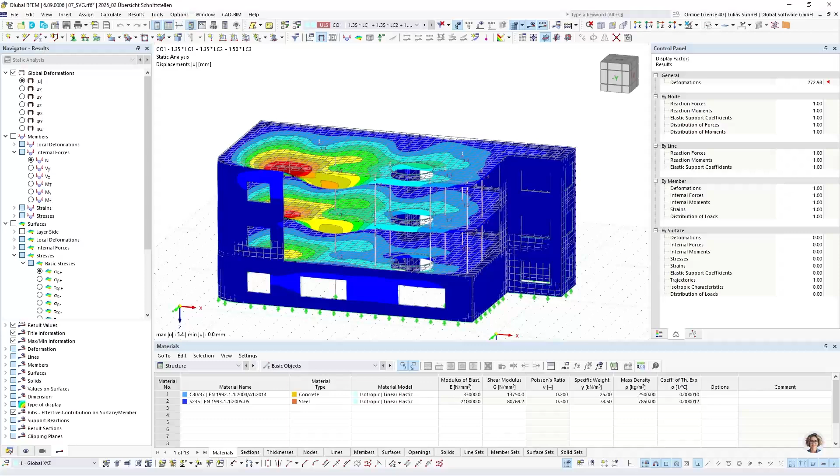So I will open another file again, for example another concrete building. And inside that file I have, for example, the rebars, the mesh reinforcement. Let's see, we can activate here the rebars - for example it's for the members, but I think I also have some for the surfaces, well just partially. And let's say that is a graphic that you want to share.

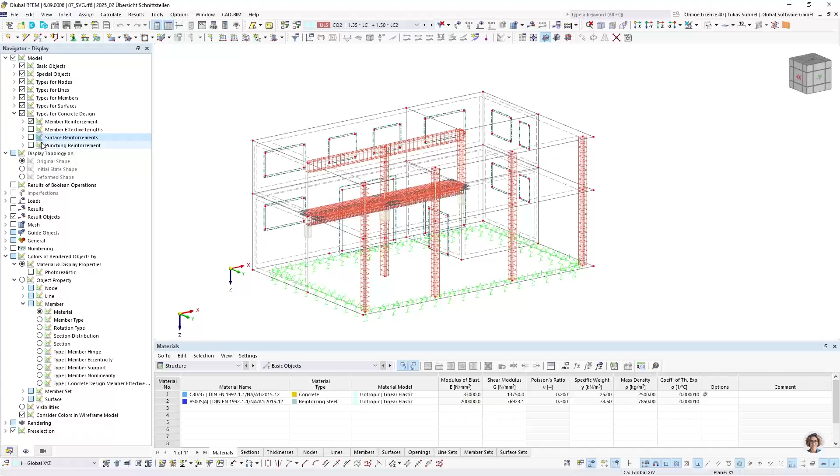Maybe you want to activate also additional information. For example, if we want to display the top and bottom reinforcements of these members or columns, or maybe even this information about the stirrups - 12 diameter 10 every 30 centimeter. So these are graphics you can create here in RFEM in the main window, and then you can export it into, for example, SVG file format under File, Export, SVG, desktop. Yeah, the name is okay.

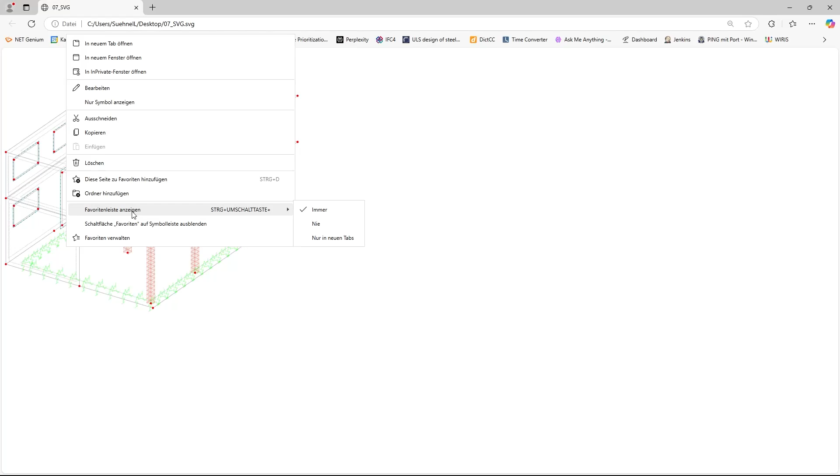And you can open these files with your browser basically. Just double click on the file, and of course on the other screen you can - doesn't matter - you can scale it, increase the size, and the quality remains really good. So that is the benefit of this file format. I personally don't have a real use case - maybe if you have a nice graphic in RFEM that you want to scale for some reason for a presentation, it could be used. That's all I can think of.

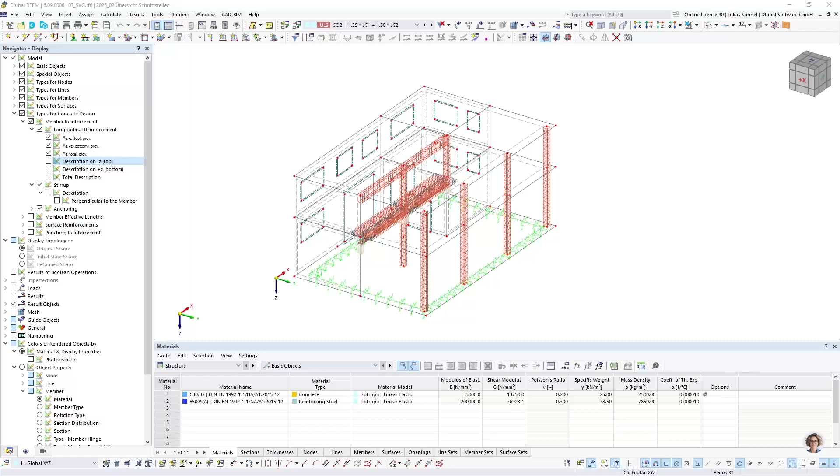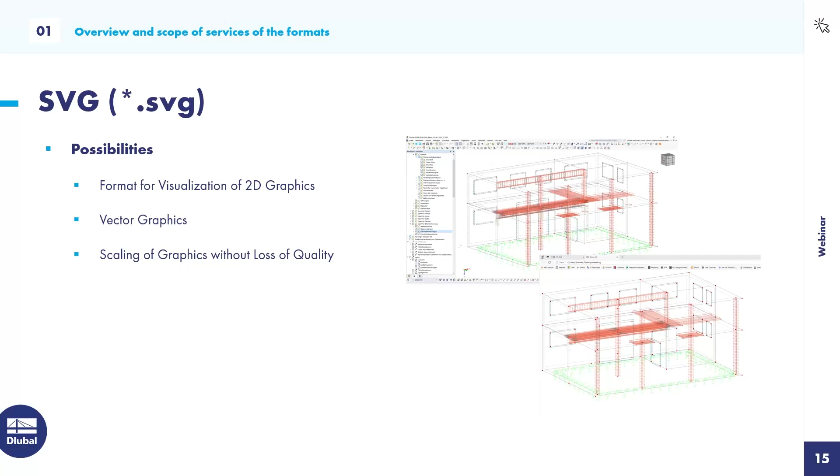All right, this were all the information that I wanted to share regarding our file formats. I hope you got a nice overview about them. Maybe you saw some workflows, or you have got some information that helps with your workflow between the detailing and the structure analysis.